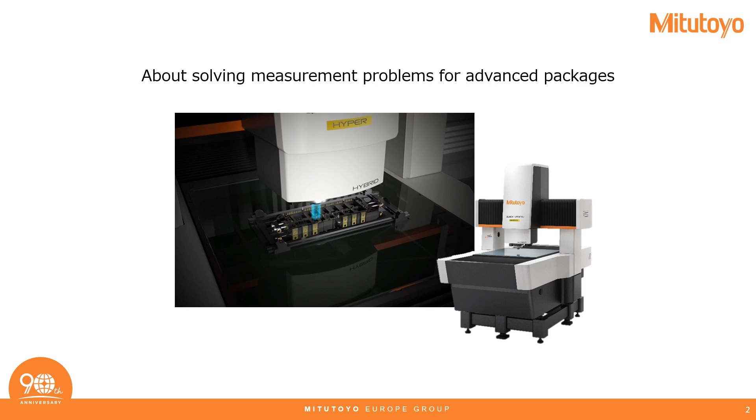Nowadays, the demand for semiconductors is increasing in all kinds of industry. In the future, this demand will continue to increase, such as for IoT, generative AI, automotive CASE, and smart factory support. Mitutoyo's Quick Vision range of CNC image measuring machines solves problems in the measurement of semiconductor packages, a particularly back-end process in the semiconductor industry.

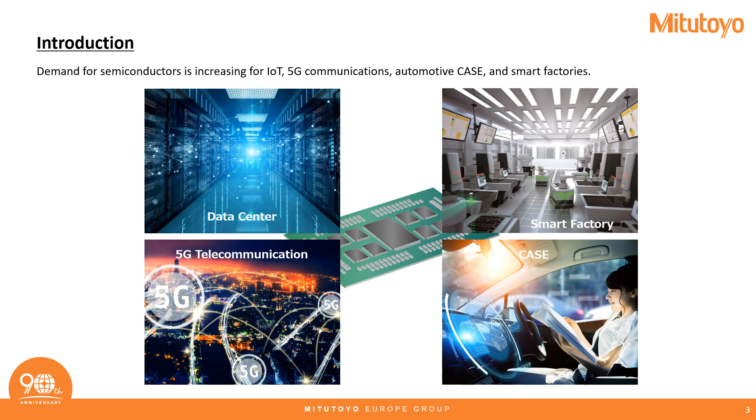Since Mitutoyo began selling CNC image measuring machines in the 1990s, the connection with semiconductor package measurement has been inseparable. For example, measurement of an insertion mount dual inline package, DIP, or a surface mount quad flat package, QFP, posed measurement problems. These packages are molded after wire bonding with IC chips on a lead frame. Measurement issues include frame dimension measurement and measurement of lead tilt and twist, and along with this, the accuracy of image measuring machines had to be improved drastically.

That's why Mitutoyo introduced the Super QV and Hyper QV in the 1990s, as you can see here. I think these packages are still widely used as legacy semiconductor packages for semiconductors that require high reliability even today.

Next, organic packages. Organic packages with RDL on printed circuit boards became the mainstream semiconductor packages for personal computers.

These packages were surface mounted with solder balls, and the measurement challenges included bump coplanarity, copper wiring line and space, and lamination misalignment of multi-laminated boards.

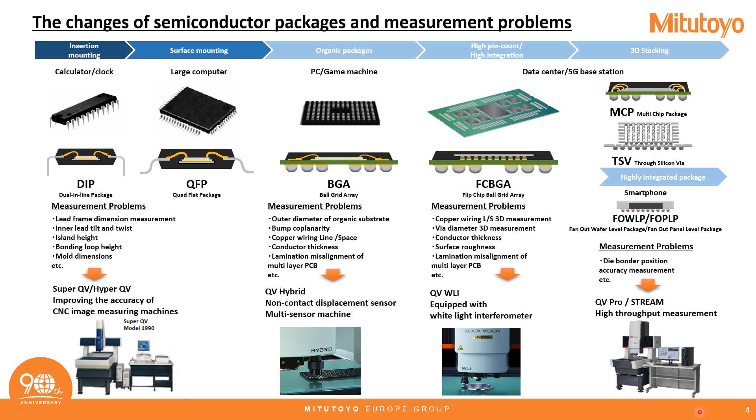Probably many of you know already, but I will shortly explain the structure of the vision measuring machine. The VMM captures the image by the image sensor placed in the main body on top of the microscope unit, and the image is processed on the computer side by our software, QVPack. Accurate dimensional measurement is possible by combining the image information with the XYZ information on the three moving axes of the measuring machine body.

So here is the image sensor behind this cover, placed on top of the optical system, the microscope unit. Here you can find the lighting unit, which is coaxial and ring light, and the XYZ movement of the machine is generated here from left to right, X-axis. The glass plate moves front to back as Y-axis, and the optical system moves up and down as Z-axis.

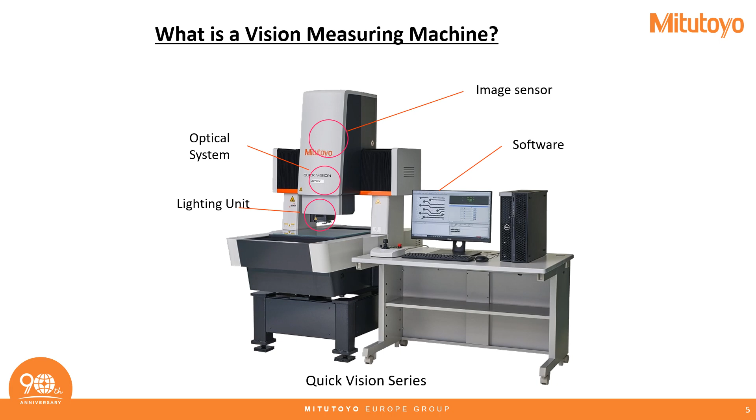Basic functions of the vision measuring machine. Here is a short summary of what you can do with image measurement.

First of all, edge detection. It is possible to measure edge contrast of the image sensor in the XY plane. This can be done in a selected box or another tool, but it is also possible to measure the contour shape by continuously acquiring the edge contrast as shown in the image below, scanning the complete contour which is in the field of view.

Also, height measurements using the autofocus function are possible. It is possible to obtain height information by combining multiple areas placed in the screen, so it is also possible to measure the lead height of such leads. As you can see here, all these leads are selected and individually measured, but it's also possible to measure the loop height of wire bonding, as you can see in the picture below.

In image processing, misalignment correction can be performed by detecting alignment marks and fiducials placed in the device. This section covers pattern search.

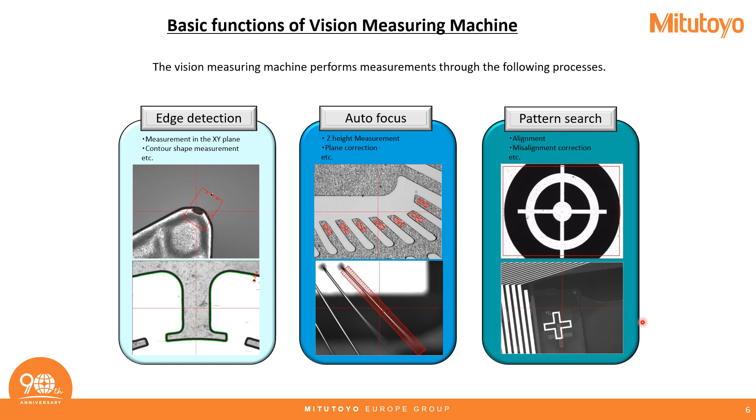This video shows the actual measurement of the object to be measured using these image measurement functions. Perhaps you're already familiar with or using Mitutoyo Quick Vision machines, but it's important to know that about 2 years ago, Quick Vision was fully remodeled, and all models were equipped with so-called strobe lighting, increasing measurement throughput by about 40%.

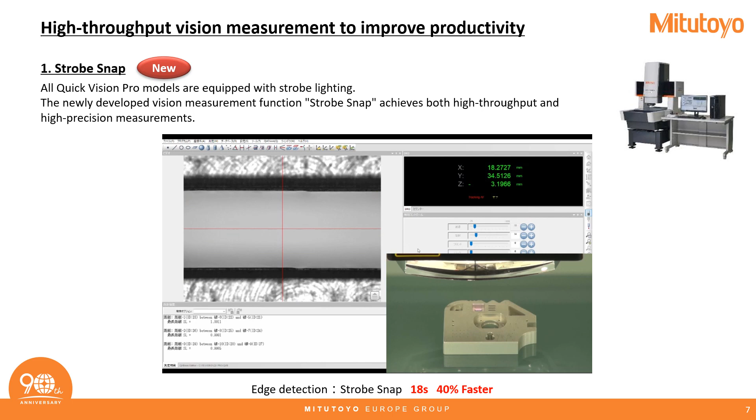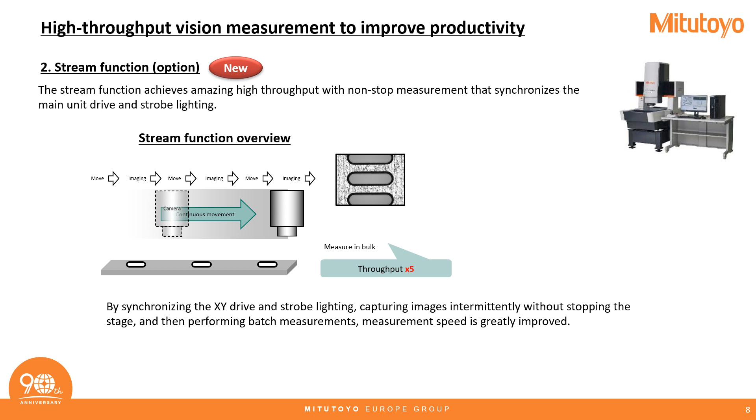This video nicely shows how fast the edge detection with strobe snap works and how the measurement throughput is increased with the new generation of Quick Vision Pro machines. In this example, strobe snap made this measurement about 40% faster compared to traditional measurement methods. In addition, since strobe lighting is standard in Quick Vision Pro, it is possible to optionally install a synchronized measurement of the movement of the main unit and the strobe lighting, which is called the stream function.

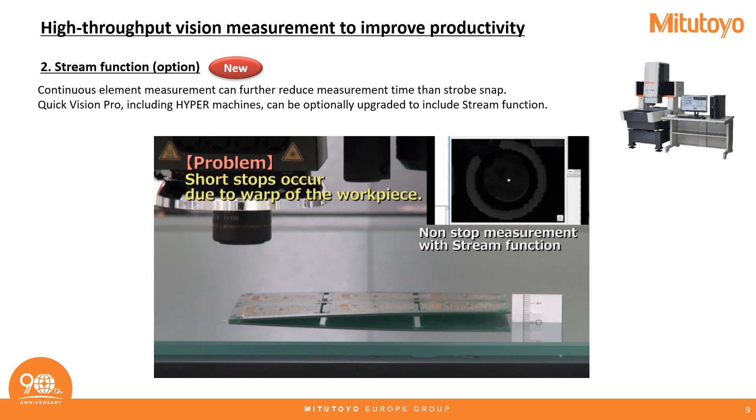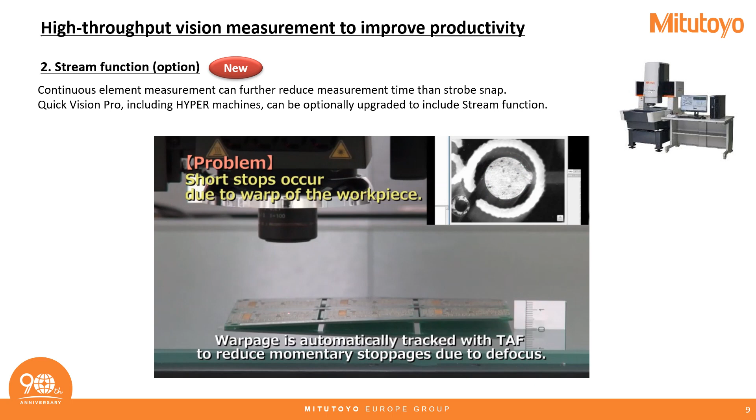In this video, you can see the measurement using the actual stream function. This is an ordinary printed circuit board, but the measurement of the pad position is measured by synchronizing it with the strobe lighting without stopping the movement of the main unit. Also, as I will introduce later, the printed circuit board is intentionally warped, but you can see that it is measured by automatically following the warp by tracking using a laser called TAF.

As a function to improve throughput, this tracking autofocus is effective in conjunction with the stream function you just saw. Normally, if the object to be measured is warped, it is necessary to perform image autofocus again and again before each image capture at the measurement target. By using a tracking autofocus called TAF, it is possible to automatically track the deformation of the measured object and reduce the loss of time caused by refocusing.

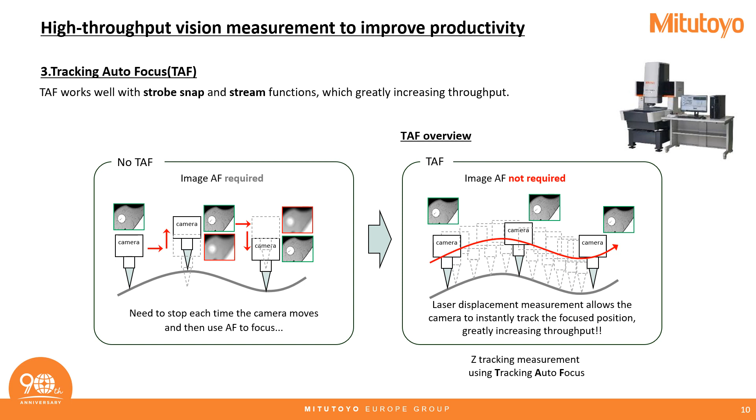So here you can see the camera moves up and has to refocus to get a focused image. And here again, and with TAF, this is not required because it follows the contour of the workpiece. Tracking autofocus: using a laser, the camera can instantly track changes in the Z height of the object being measured.

This tracking autofocus function can also be used with connector terminals as shown in the video example, as it can be tracked even in non-continuous shapes. In this case, we were able to shorten the measurement time by about 65%, from 38 seconds to 13 seconds. This can be realized by using the Z-axis hold function, which further eliminates Z-axis movement and saves time.

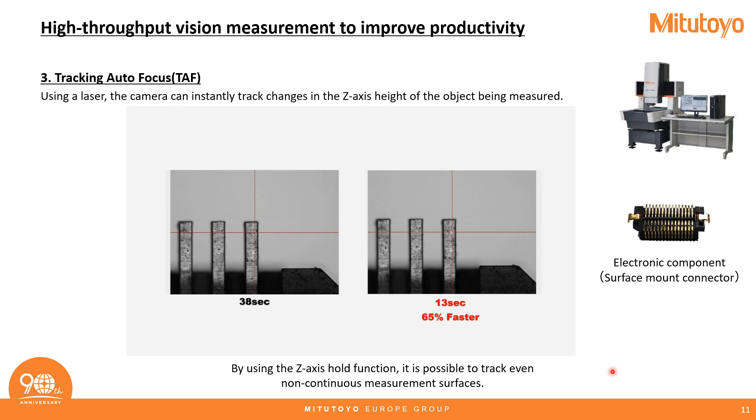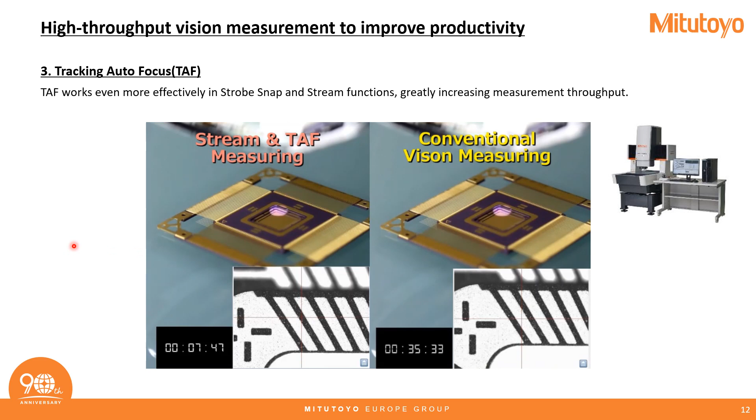In this video, we use the stream function and TAF to measure cavity and different heights of wiring compared to traditional methods. In the left video, you can see stream and TAF combined. In the right video, the conventional vision measurement method. Although it is a measurement of only one side, the measurement that used to take 35 seconds with the conventional method was improved to 7 seconds by using the stream function and tracking autofocus function, which is about 80% more throughput.

This is a bit of a long introduction to the features of the product, but I would like to introduce the fan-out wafer level package measurement solution using the stream function and tracking autofocus function. It is possible to output coordinate correction data to the equipment used for rewiring formation by measuring the entire position and angle deviation of each die with the stream function in the post-process of the first die.

Even if the wafer or panel is warped, it is possible to reliably measure the position of the die by using tracking autofocus. By the way, when measuring 25,400 dies placed on a 300 mm wafer, it takes about 34 minutes to measure, compared to 183 minutes with the conventional method, and the throughput is improved by about 80%.

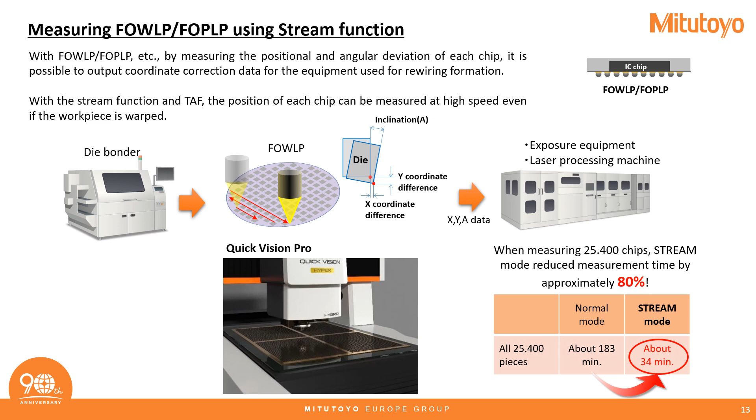Although the number of dies in this video is different, it nicely shows the actual measurement with the stream function and tracking autofocus function. In order to see the performance of the TAF, the wafer is tilted by 10 mm, but as you can see, it is properly followed in the Z direction and measured.

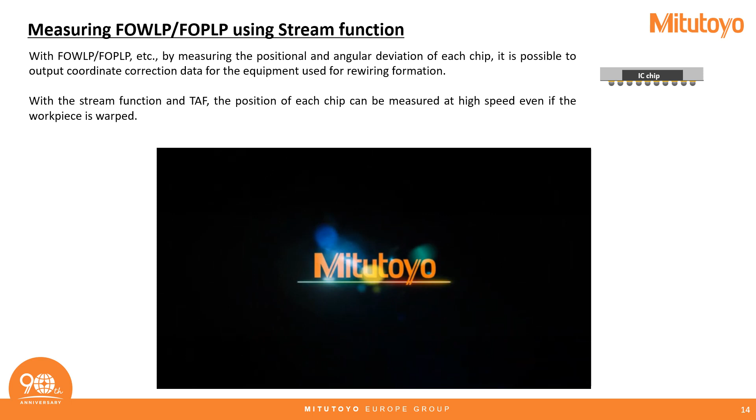The video just shown was an example of measuring in a fan-out wafer level package. But it is also possible to measure the position of a die placed on a lead frame, such as a power semiconductor or an organic substrate, using the stream function or TAF. By passing the measured position and tilt information of the die to a laser processing machine, it is possible to improve the accuracy of longitudinal wiring connections.

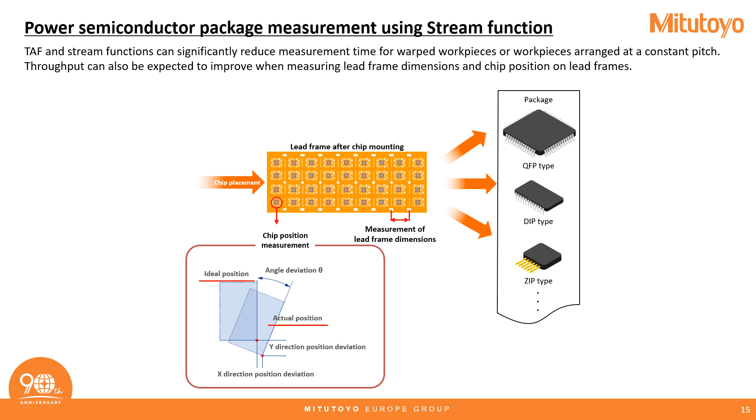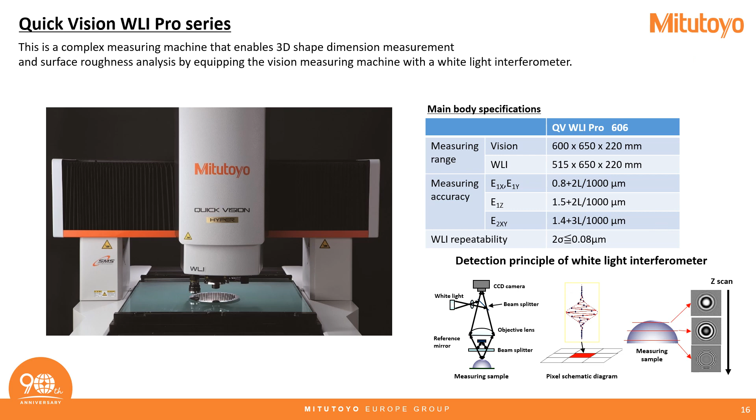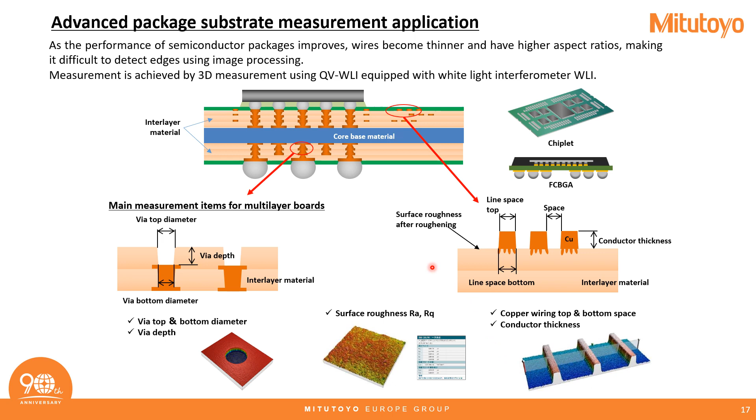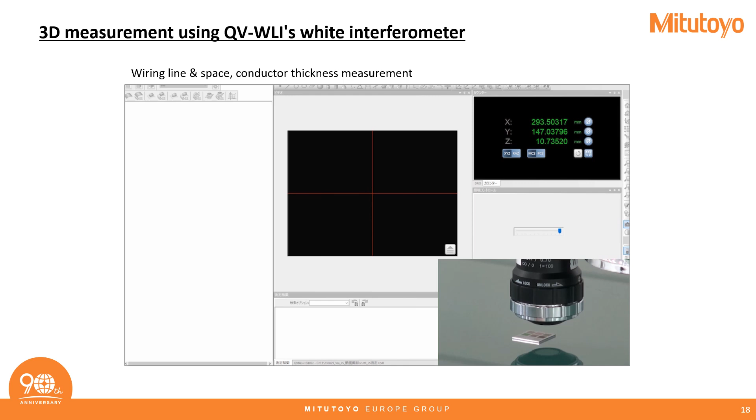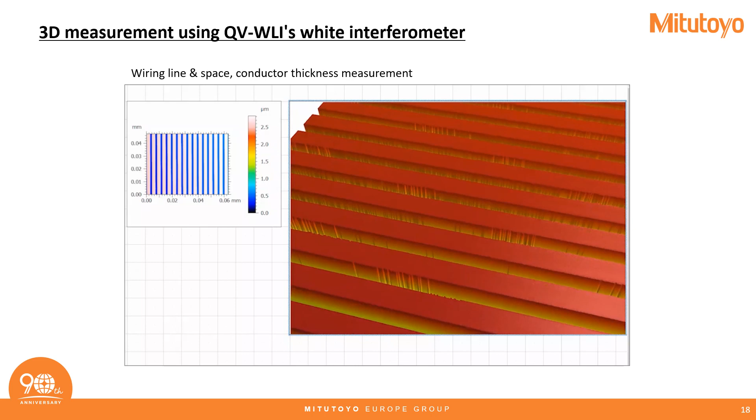Here you can see a video of the line and space measurement with QVWLI Pro. This is the analysis of a 2D section, and here you can see the 3D topography result. And in this video we show you the top diameter, bottom diameter and depth measurement of vias with the QVWLI.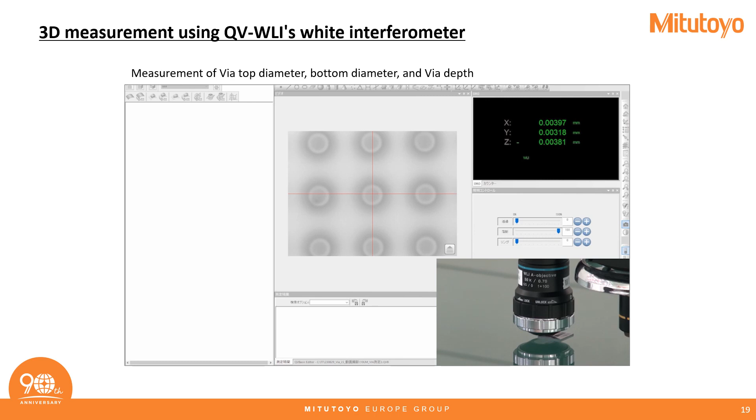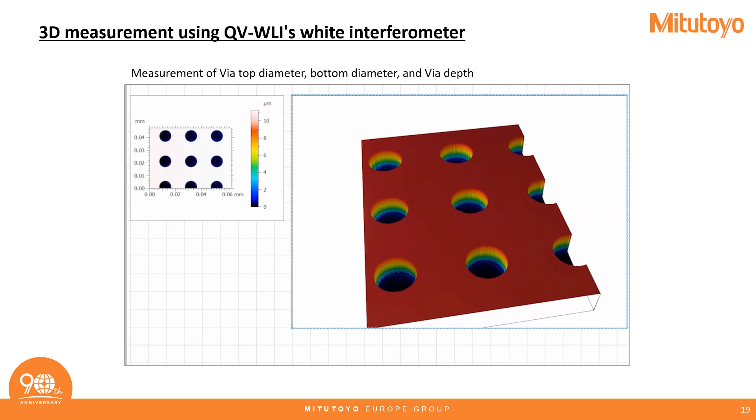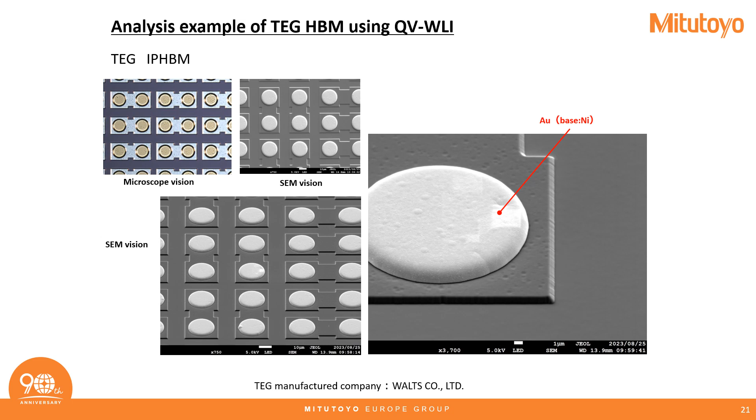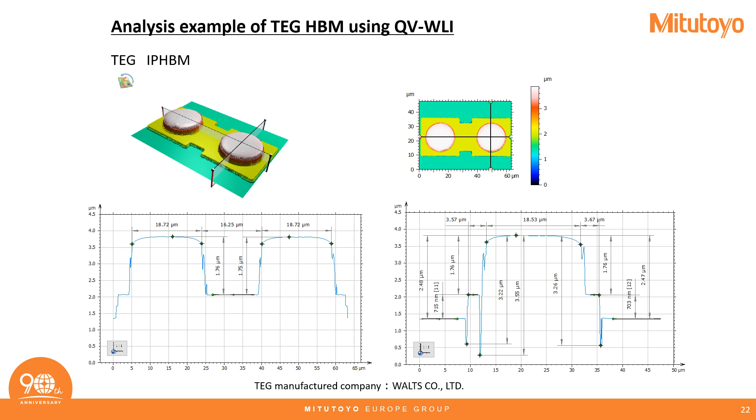These are the dimensions shown in the case of HBM TEGs that we had manufactured externally and verified with QVWLI. This is a SEM image of a gold-plated bump on nickel. This was measured with QVWLI, and the bump height and bump pitch were measured by cross-sectional analysis from the 3D shape. The measurement results of the QVWLI of each layer are also very close to the SEM results.

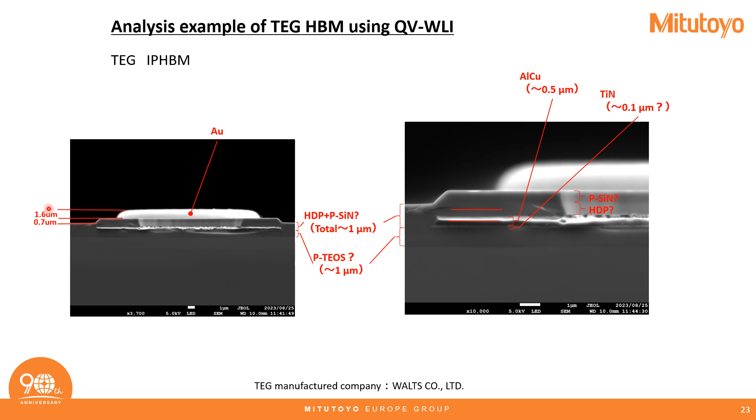Lastly, I would like to introduce a QuickVision model which is equipped with a near-infrared light source. In order to emphasize edge contrast, QuickVision has a color illumination type with RGB and LED elements for each wavelength: red, green and blue illumination sources. Now I will introduce the measurement application of advanced packages that are becoming more multi-layered by mounting near-infrared light sources in vertical AP illumination and ring lighting.

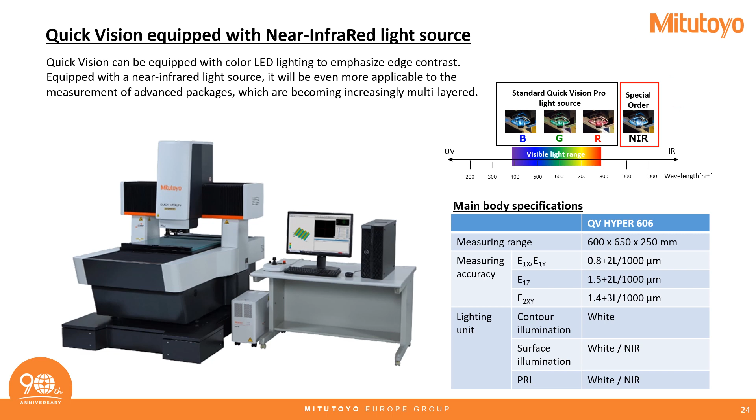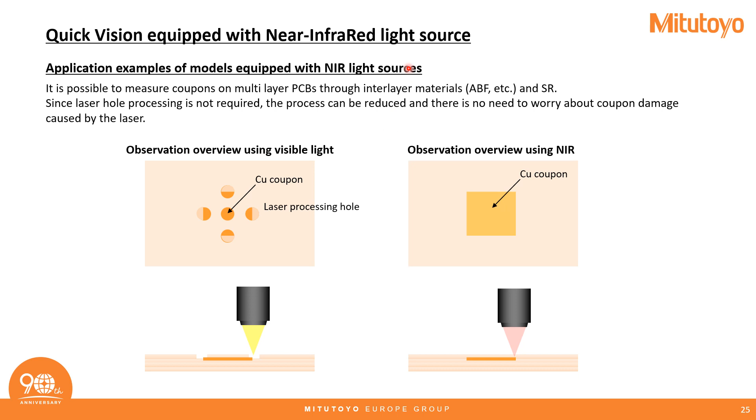In addition, by taking advantage of this characteristic of transmitting resin, the range of evaluation can be expanded, such as measuring the accuracy of UV laser processing by observing and measuring built-in components arranged in interlayer materials such as silicon bridges.

In addition, the stream function and tracking autofocus function introduced in the QuickVision Pro can also be used in other applications in the semiconductor manufacturing process, such as measuring shower heads, electrostatic chucks, sealing molds, and probe cards and IC sockets.